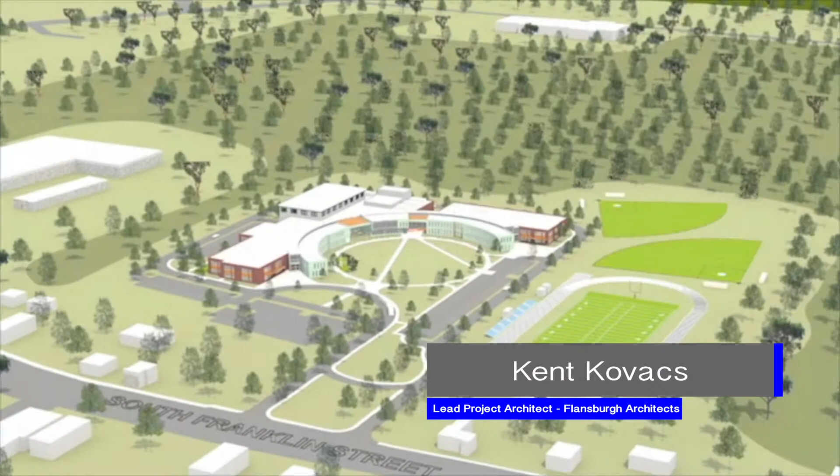This is a walkthrough of the new Holbrook pre-K through 12 school. It's a great project with two independent school wings, one for the pre-K through 5, the other an independent 6 through 12 wing. So we walk around the building.

This wing is the 6-12. It's a two-story building with a dedicated parent pickup drop-off, bus, and entry. Here we have the auditorium with stage house for performing arts, a new gymnasium, and also new district offices.

As we rotate around the building, this is the pre-K through 5 wing. This wing has two dedicated play areas for pre-K and K, and a dedicated play area for grades 1 through 5.

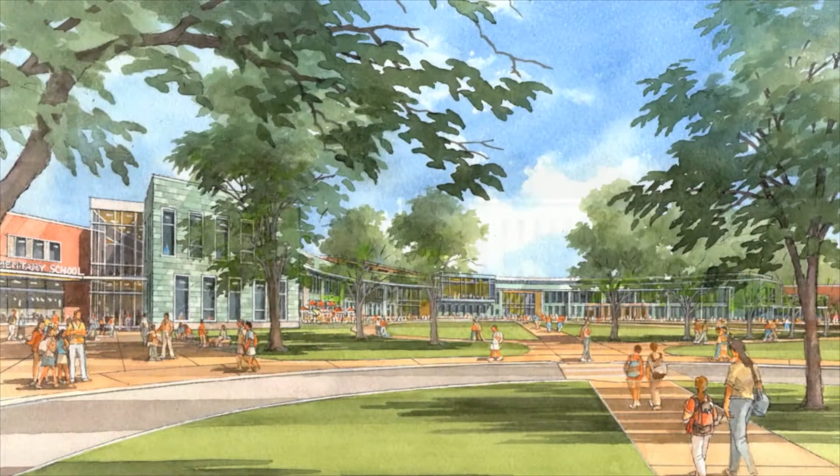This is an artist rendering of the feel and spirit of the school, paying close attention to material and scale.

Now we'll enter into the pre-K 5 wing. Through the vestibule, this is the point of control and security. Into the library, we see the use of vibrant colors and materials as important for establishing the feel for this school.

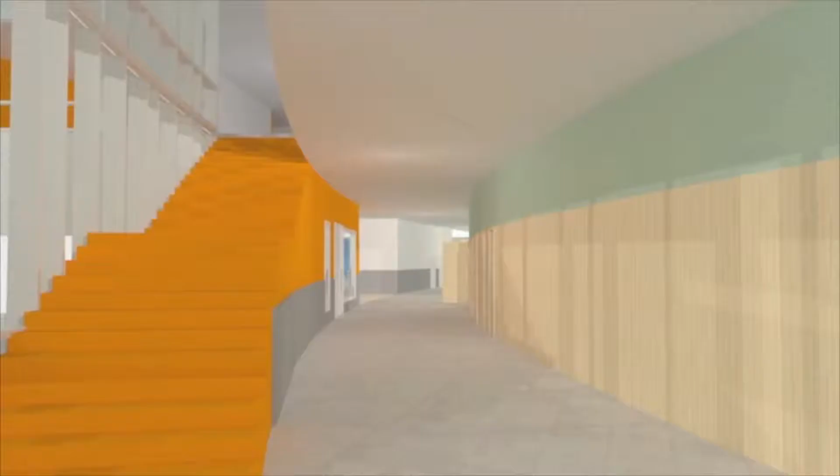As we walk down the hallway, we'll enter into a general classroom. Here you can see natural light, smartboard technology, flexible furniture.

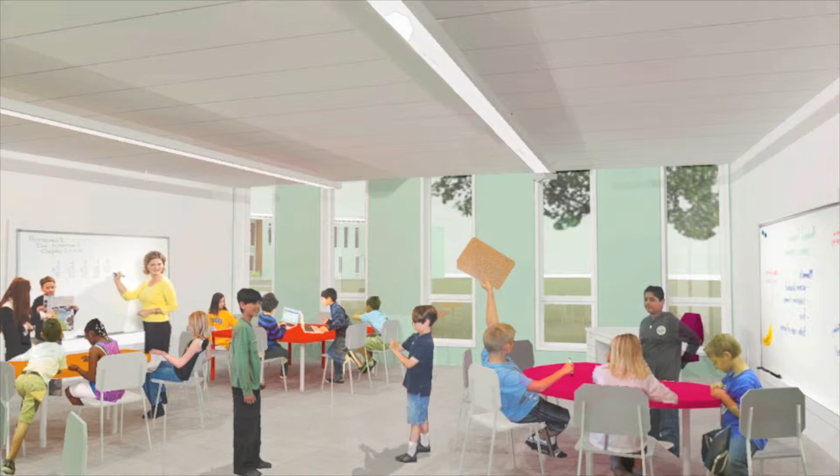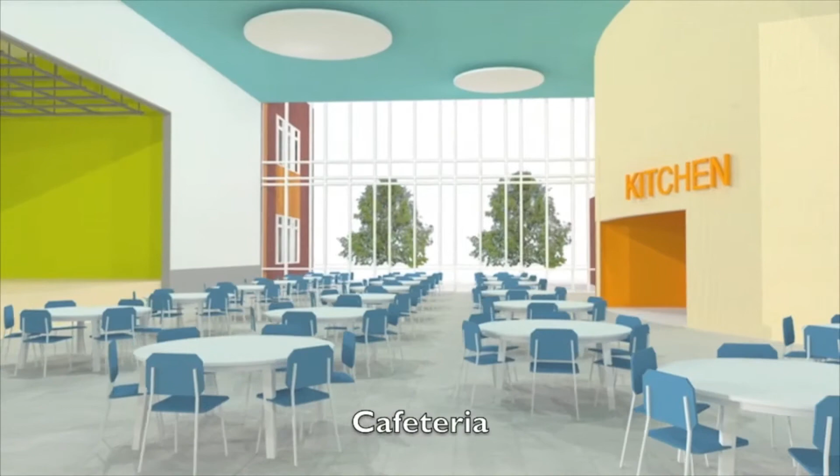And now we'll enter into the cafeteria space. It's a dedicated cafeteria space for this school with kitchen, seating for all students, and a stage component for performing arts, so the students can have a stage production without going into the other building.

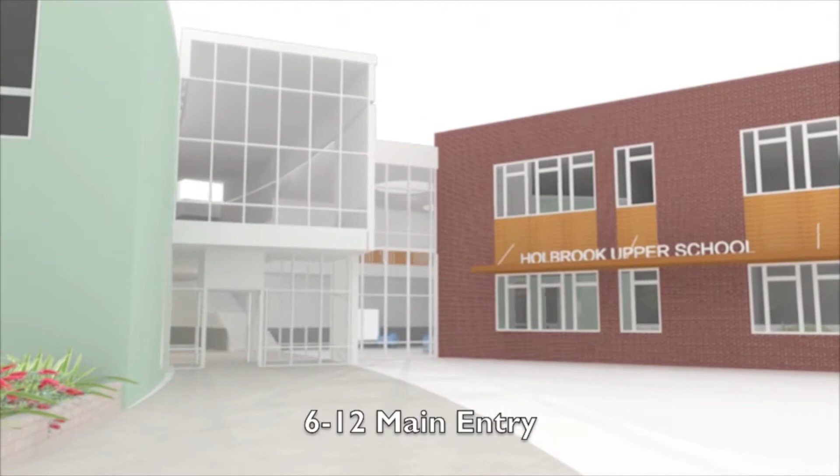Here we'll enter into the 6-12 building. Again, through the main entrance is a vestibule for security. You'll see in this animation that there are breakout spaces, spaces for collaborative work, such as this Team Commons to the left.

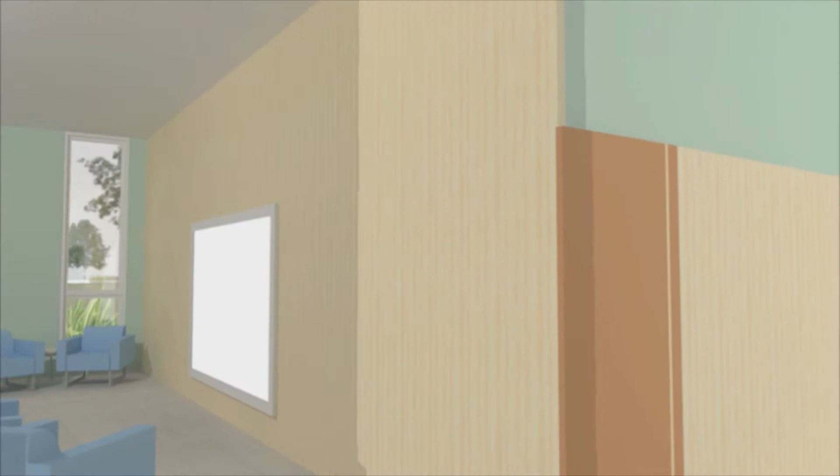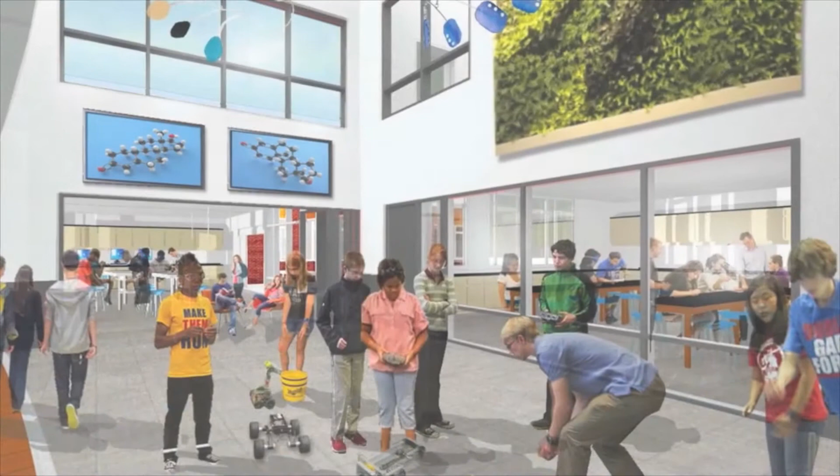And here we get a look at the STEM Commons. STEM is science, technology, engineering, and math. We have the robotics lab and science labs converge at this one point, and you can see the students working on a robotics experiment. This could be a really exciting space for the kids.

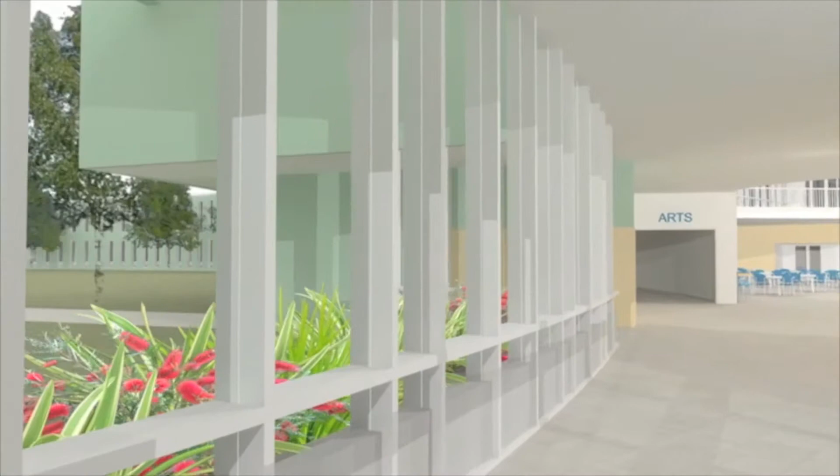Now we'll enter into the shared core portion of the building that comprises the cafeteria, the auditorium, gymnasium, and media center.

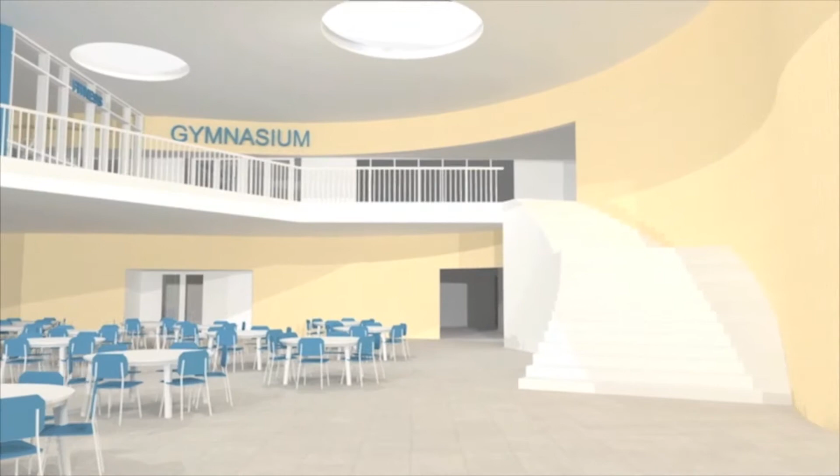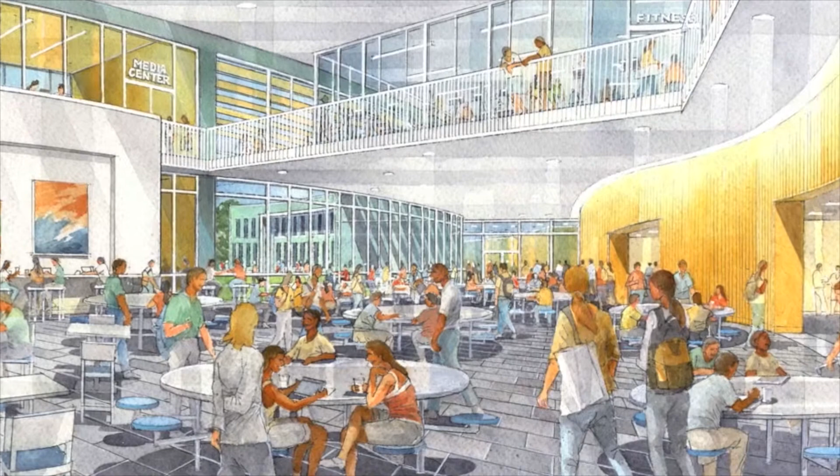You can see the gymnasium above and the cafeteria. Here's a look at the feel for the space, an abundance of natural light, the play with material, with wood paneling.

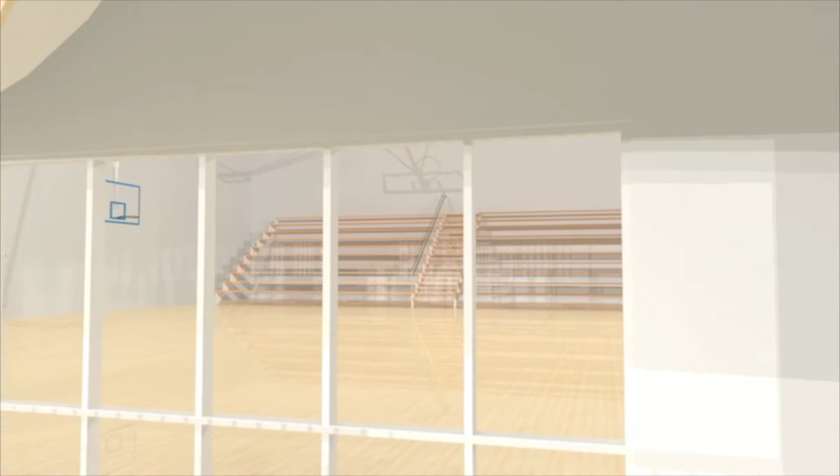And as we go up the stairs, we see the gymnasium for grades 6 through 12, bleacher seating for 500, the fitness room, and the media center.

We envision many of the spaces you've just seen to have an added benefit for community use.

The need for the project is to establish a long-term solution for your deteriorating schools. It's also to avoid the loss of high school accreditation and provide educational spaces that meet the MSBA state standards.

Advantages of a pre-K 12: this consolidates resources in order to provide additional services and space. It also allows faculty, staff, and specialists to become more accessible to students. In addition, it provides state-of-the-art security for safety of the students and will retain great teachers.

The value of an accredited high school: this assures parents, students, and community members that the town provides a quality educational program. It also assures colleges that graduates of that high school were provided with an educational program that maximizes students' learning. And it's shown that a town that loses accreditation has an impact on property values.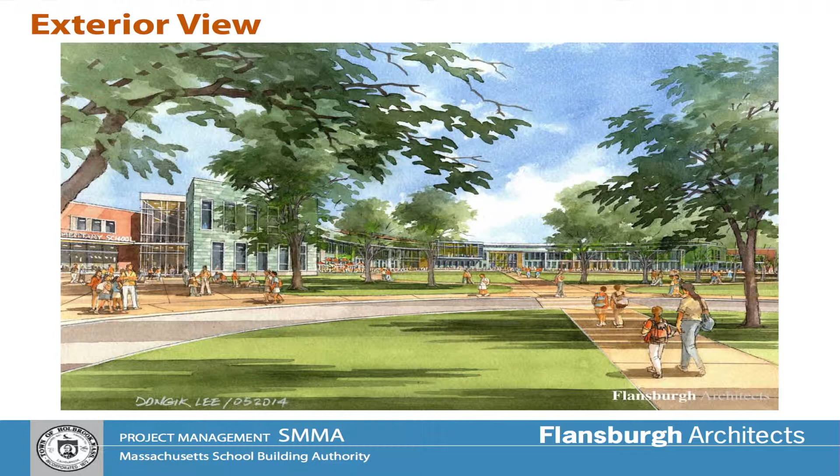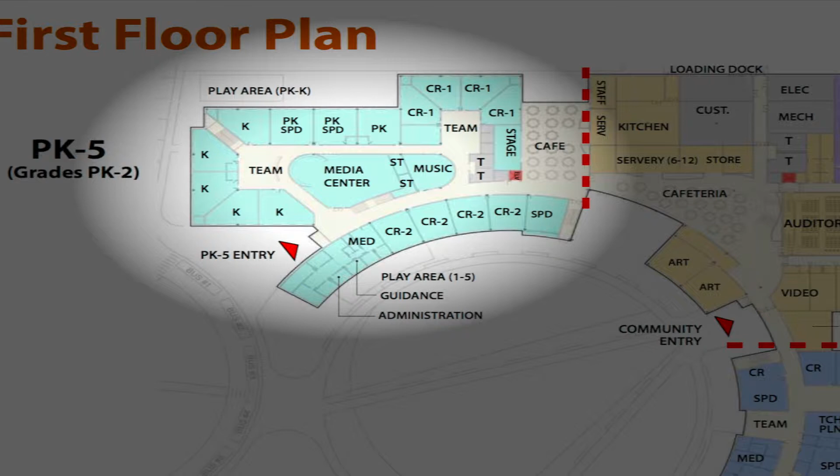They have their own media center and their own cafeteria. That red dash line indicates a solid wall where the schools are separated. There's one door used for service that will be locked and alarmed at all times, limiting any activity between the schools.

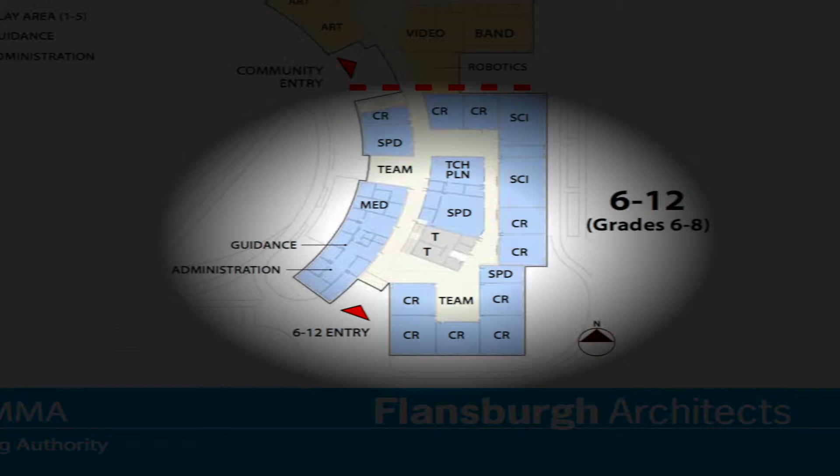Shifting over to the wing for grades 6 through 12, shown in a darker shade of blue, we have the 6th, 7th, and 8th grade located at this level. It's adjacent to the administration and guidance for added supervision, and there's a teacher's planning area centralized in the plan for additional supervision of grades 6, 7, and 8.

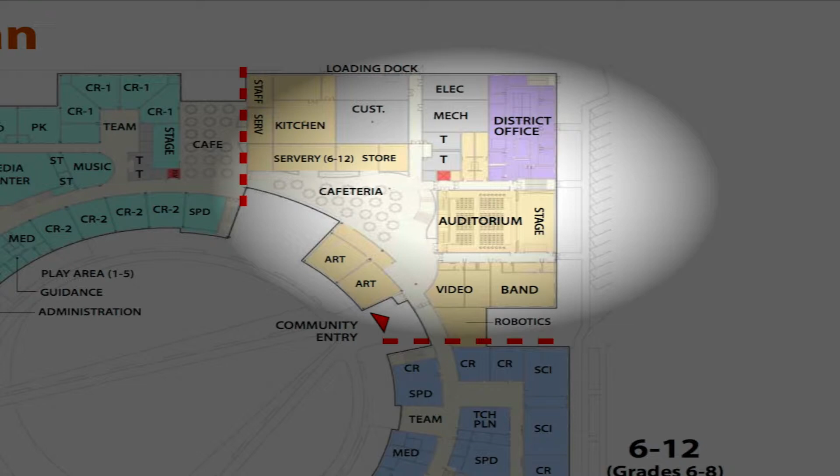In the center of the plan, we have the community wing. This serves activity for grades 6 through 12 with an auditorium, a cafeteria, the arts, a video lab, band, and robotics. And if we shift north in the plan, we have the district office, custodial, and the kitchen.

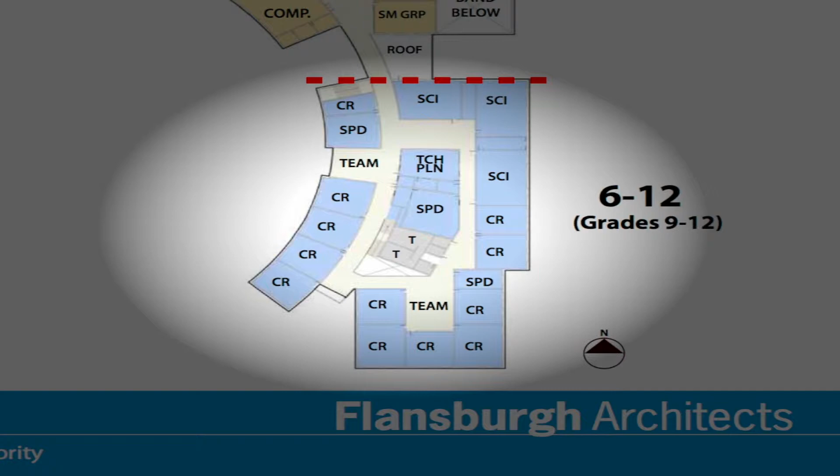On the second floor plan, in the pre-K through 5 wing, we have general classrooms for grades 3 through 5 and access to their dedicated gymnasium. The grades 6 through 12 general classrooms are for the high school. And in the community portion of the building, the shared core, we have the gymnasium, a fitness room, an auditorium, and the media center.

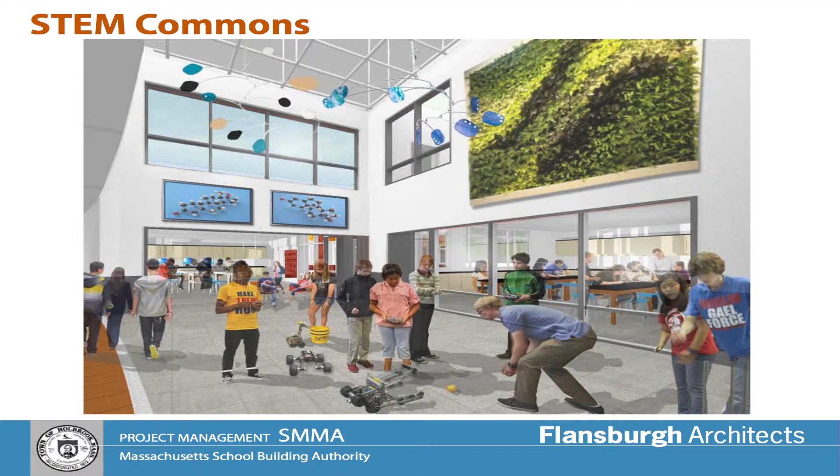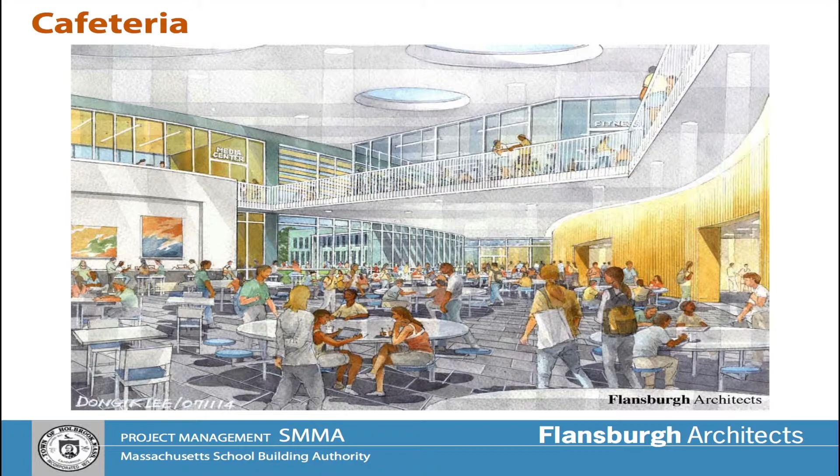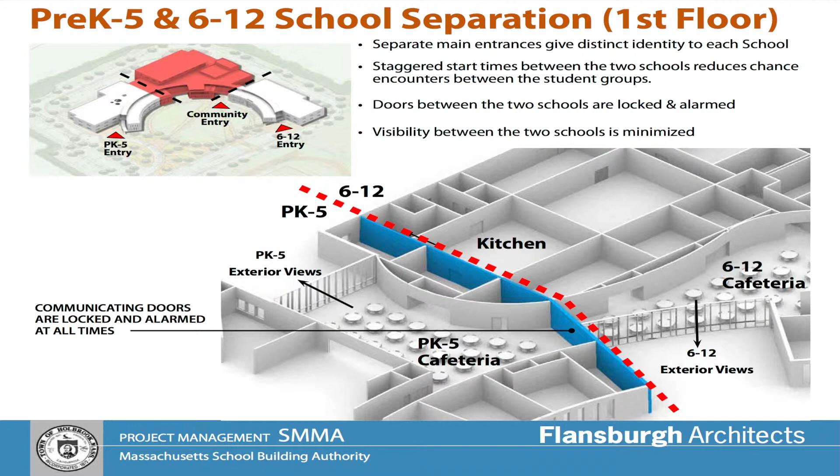Besides physically separating the buildings with the wall, visually they're separated too. The pre-K-5 cafeteria views out to the north, and the 6-12 cafeteria views out to the south. So we're looking at different ways, not only physically separating with the wall, but also visually reducing interaction between the two groups.

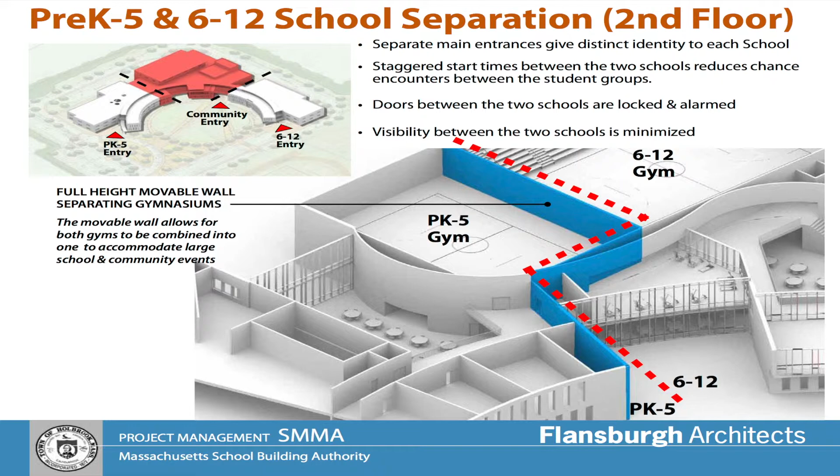Here's a look at the upper level. As you can see, the solid blue wall cuts through the gymnasiums, and that's how it's divided at the upper level. This building will be a green building.

It has 2% additional reimbursement by the state, and it meets important criteria for sustainable sites, water-saving features, energy efficiency, materials and resources, and proper indoor environmental quality.

Were other options considered? Yes, many design alternatives were considered. Here you can see 4 options that speak to different grade groupings: a 6-12 option, a 7-12 option, a pre-K-12 option, and a pre-K-8 option, of which many designs were studied on the junior senior high school site.

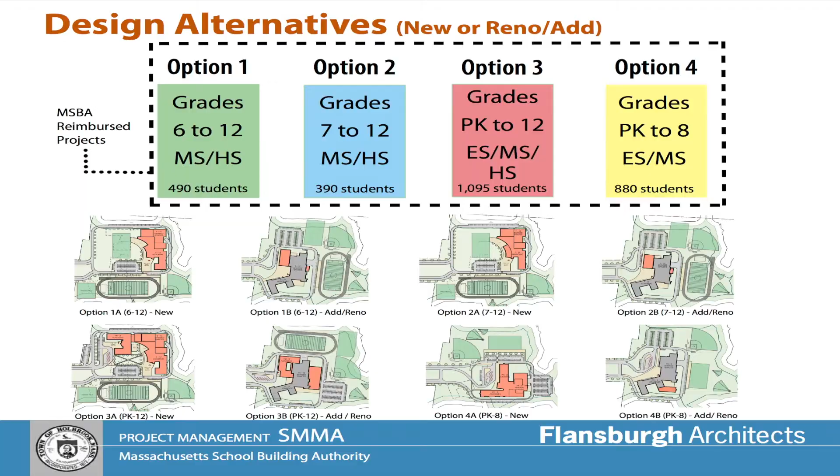Part of the criteria for evaluating these options - here you see the pre-K-8 option. These are some points taken from the Mars Consulting Group that studied the regionalization.

This does not address grades 9 through 12. The 9 through 12 would have to be tuitioned out or a regionalization agreement reached prior to MSBA approval. There's no excess capacity in surrounding towns. It would require the demolition of the junior senior high school, and with this type of plan, there would not be an auditorium, a football field, or a track.

This option would cost $7 million less than the pre-K-12 option we're looking at. Through evaluating those options, the pre-K-12 option was the best option that met the need for the project. It's also the only option that can be converted into a regionalized school at no cost to Holbrook.

And since February 2014, Holbrook and Avon have continued conversations on regionalization.